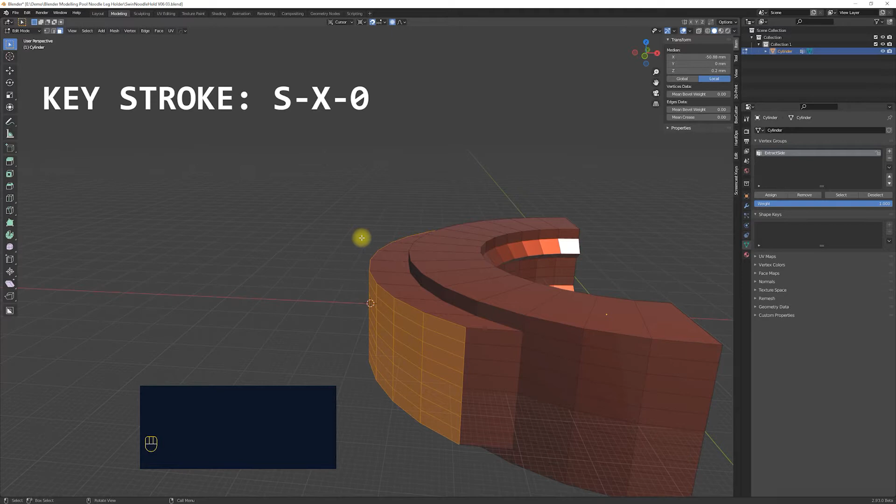In the next step, I create the extensions for the dovetail attachment. I select the set of quads and extrude them in the X direction. To have a straight surface for further modeling, I switch to median pivot point and scale in X direction with a value of 0. This aligns all the quads at the median X position. The related keystrokes are S X 0. Now we can extrude the quads again to create more geometry.

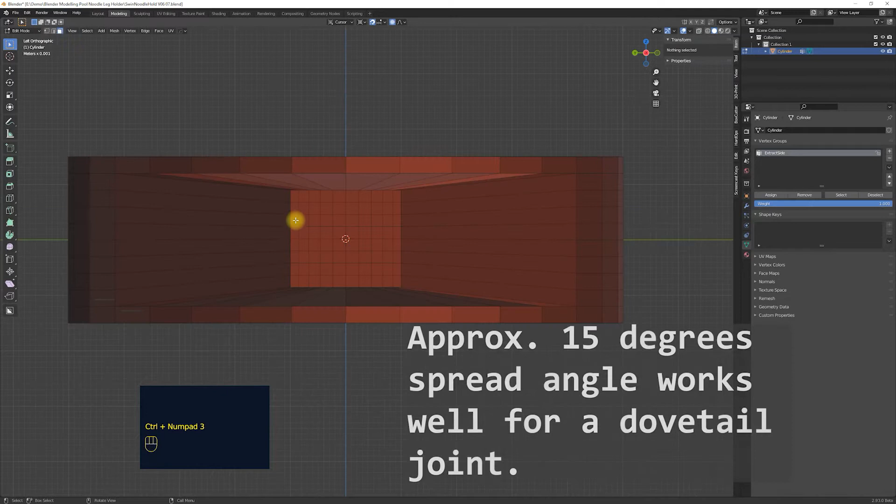Using the orthographic views, you can easily adjust your geometry to the grid view using the absolute grid snap function. To assemble the parts, I decided to use a dovetail joint. Here I'm modeling the first part of it. And I will also use the geometry to create the counterpart of it. To do this, I simply copy the related geometry from the first part and make the new counterpart object out of it.

To give the components a little bit of room, so that it is not too difficult later to push the components into each other, I will later adjust the geometry and leave about 2 to 3 tenths of a millimeter of space. This should be sufficient for a snug fit. But keep in mind, PLA will shrink by another 2 to 3% within a couple of days.

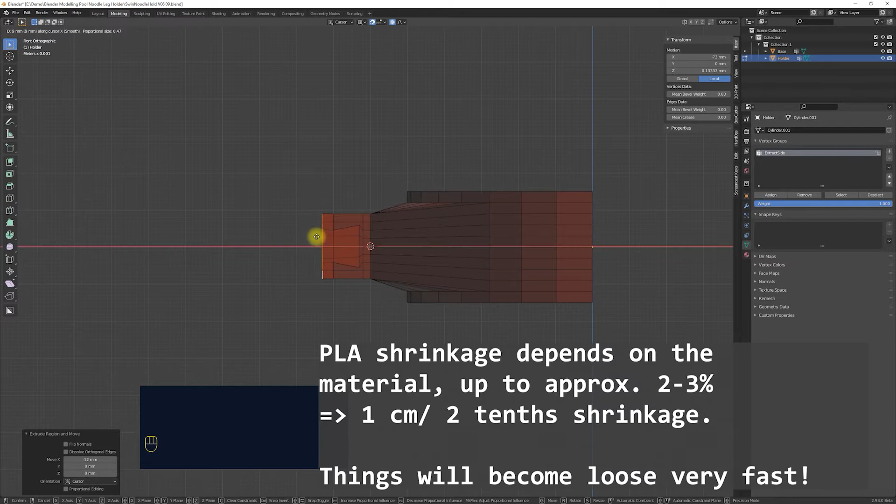For the placement of the legs, I model a nice rounded ergonomic shape. This is where the advantages of proportional modeling in Blender become apparent. I select part of the geometry and scale the attached geometry proportionally. Here we can choose different curve types or select different origin points with the pivot point menu entry to affect the results. With the mouse wheel we can limit the area of effect, and here you should be careful to avoid modifying fitted structures or structures with fixed dimensions.

In order not to use unnecessary material and also to print faster, a shape can always be designed with holes and empty spaces, as long as we don't need this for the structural strength of the workpiece. As soon as parts of the geometry are not needed for the strength of a workpiece, they can be omitted if it fits the overall design requirements.

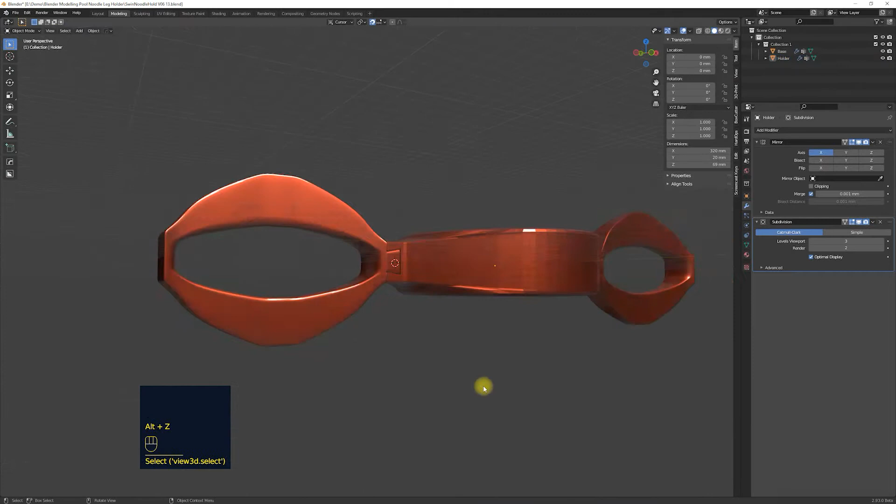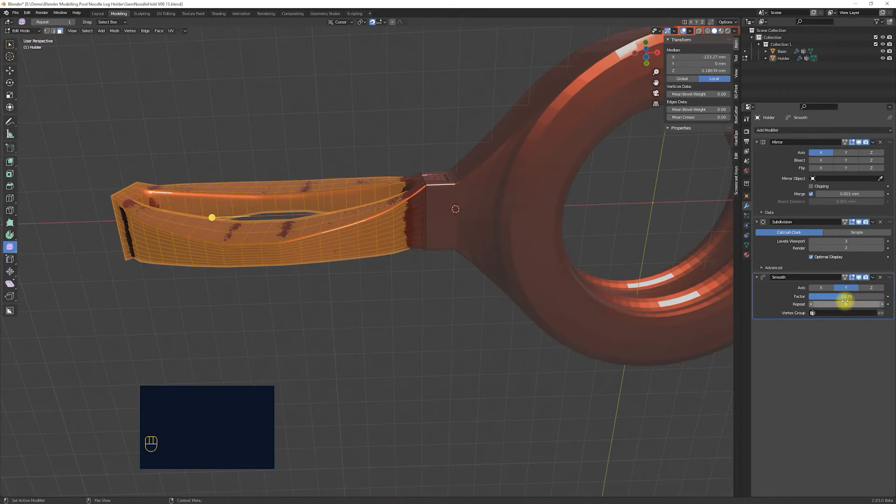To support the subdivision modifier algorithm for smoothing, you should have equal-sized quads. If you have difficult sections in your geometry, you can use the smooth function in the mesh modeling tools to make your quads more equal and to smooth out your geometry.

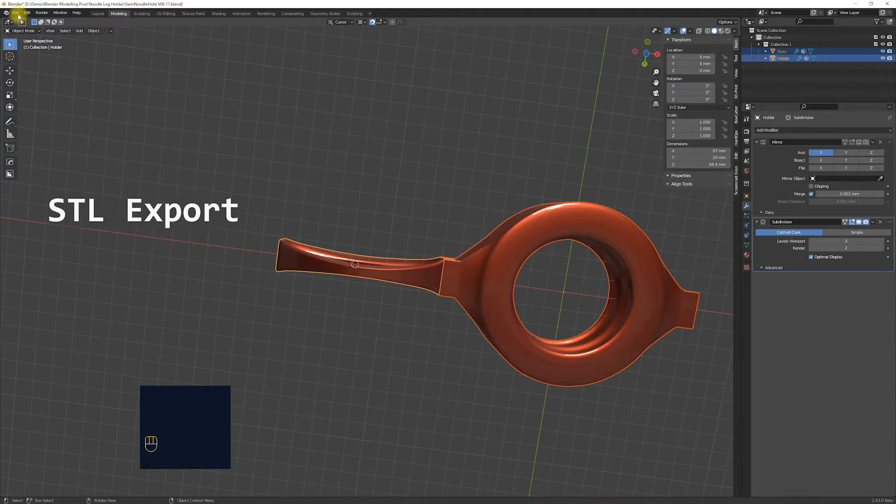Because the subdivision surface modifier works in proportion to the size of the geometry elements, like the size of edges, the size of faces, it is best to make the individual elements more equal and smooth out the mesh as much as possible. To get a nice rounded surface for the ring part, I use the 3D cursor as a pivot point in combination with proportional editing.

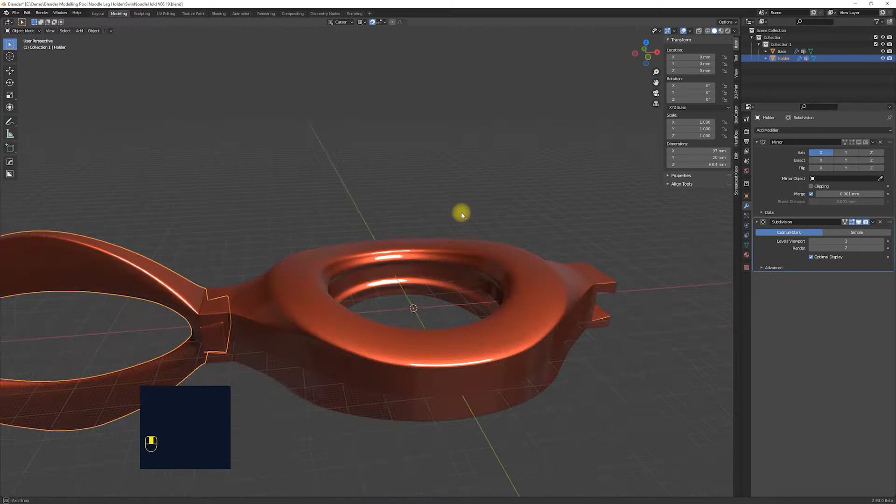Looking at Cura at this time, once I loaded the model, I saw quickly that there were some problems because there were some holes in the model. But this is no problem at all, so I go back to Blender and add additional geometry. Blender supports this very well with several functions like bridge edge loops or grid fill faces.

I can also round off the edges of the dovetail connections a bit and use the bevel function in the mesh modeling toolset. To find all errors, we can also use the functions of the 3D Print toolbox, which is an add-on that comes with Blender. Here I use the 3D printing toolbox to show me the errors in my geometry, and then I can use the mesh modeling tools to correct them.

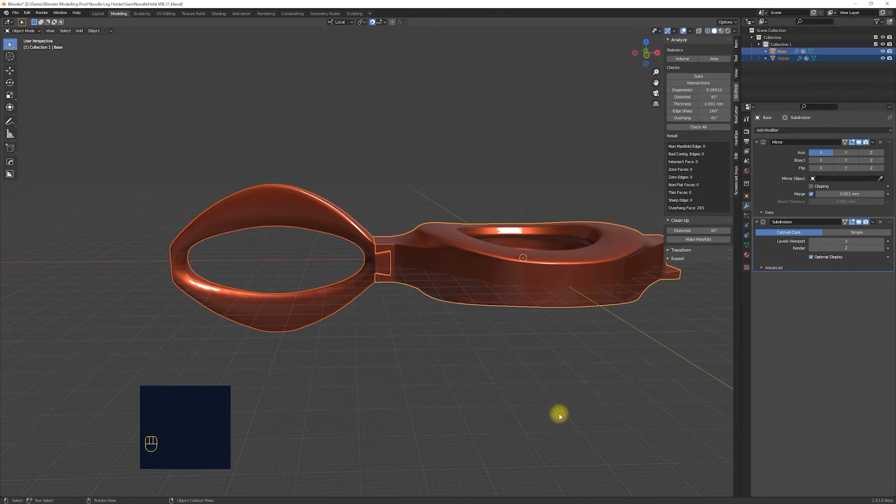I do the slicing in Cura. I show the settings on the right side, and you can just slow down the video speed to see all the individual entries that I changed. For this model I have chosen a layer height of 0.2 mm. The material is PLA plus filament, which is a bit harder and more stress resistant than normal PLA. But it also has to be processed at higher temperatures.

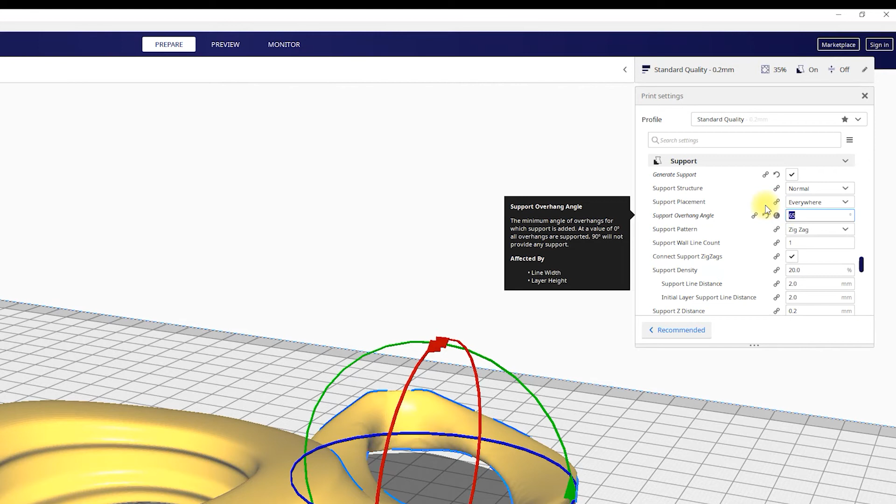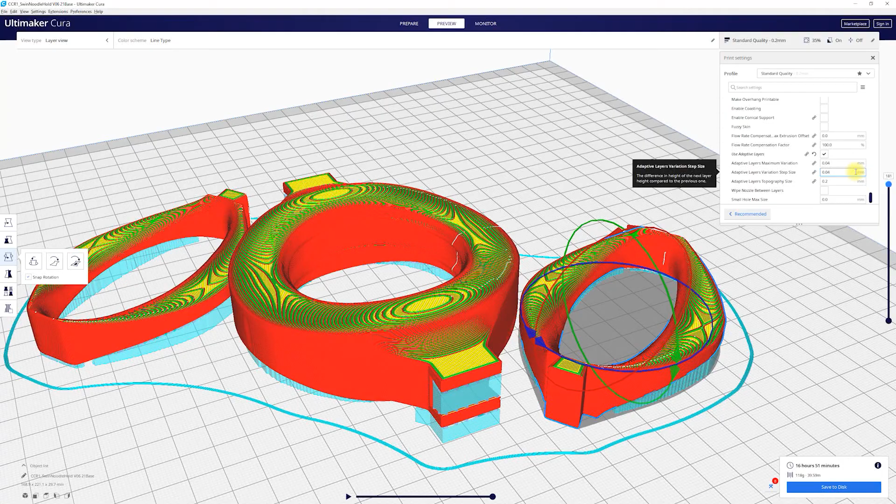I think the component is not exposed to very high mechanical loads, and a filling between 25 and 35% should be sufficient. During the inspection in Cura I noticed that there was a weak point in the connection of the dovetail, and I reinforced the model at this point. The total print time for both parts was roughly 17 hours.

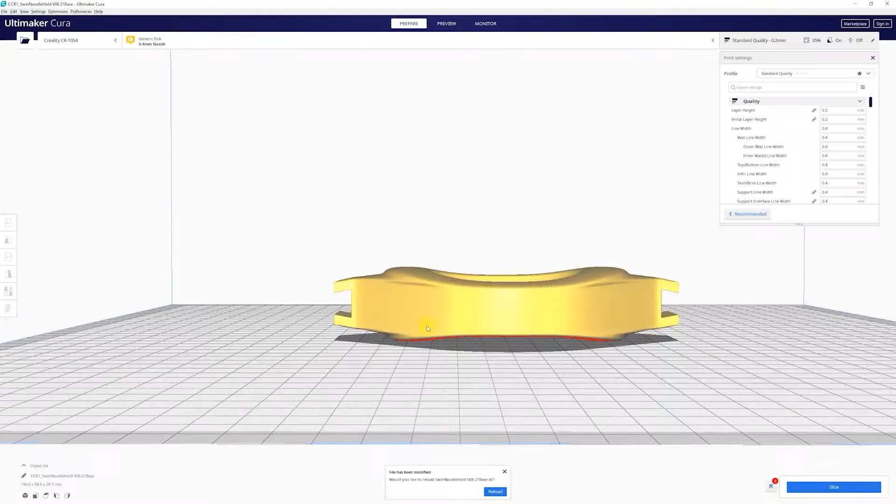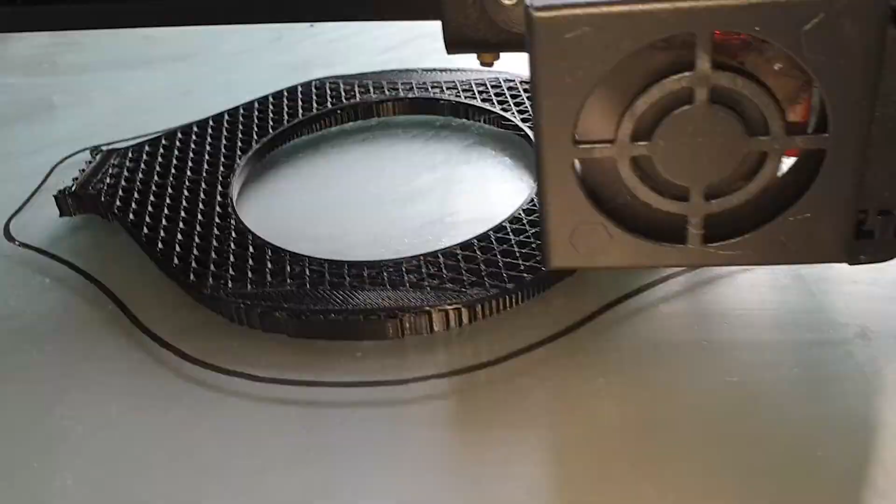Because I could print the parts one by one and assemble them later, I was able to use an optimal layer orientation for each part. This is very important for strength, especially since the parts are twisted by 90 degrees to each other. So I've been able to use large layers on the horizontal plane with maximum layer adhesion between the layers. After printing, I cleaned the print parts from the support structure.

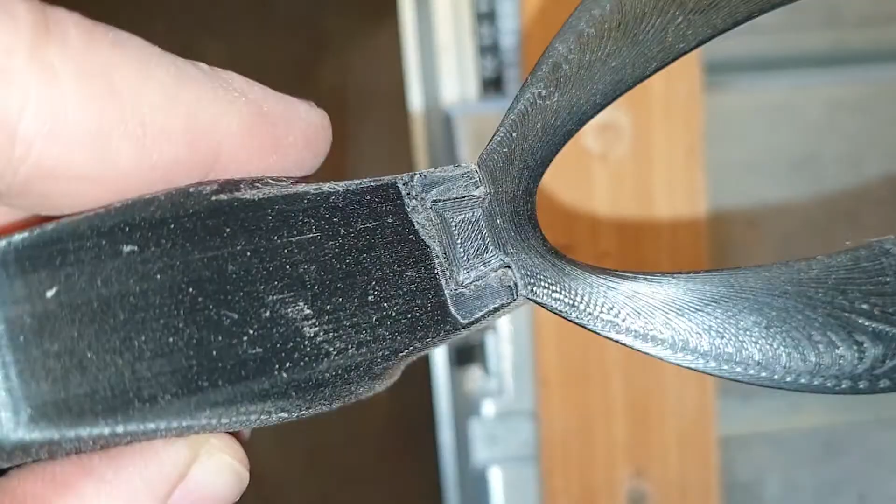Unfortunately, I found out that I was too much in a hurry, and I set the temperature a little bit too high, maybe 5 degrees. So the support structure was difficult to loosen because it had melted onto the model. But it's a prototype, so you have to take small setbacks into account. Nevertheless, the parts could be put together quite well. All in all, I'm satisfied with the result, and the first test looks successful, but see for yourself.

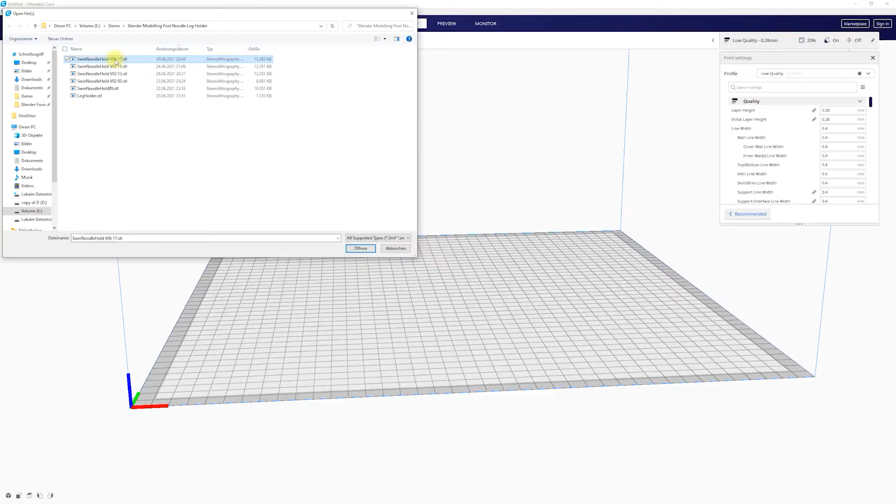I wanted to show with this video some advantages of Blender when it comes to designing 3D objects. With Blender we have the possibility to combine the artistic approach and CAD working techniques. Of course, Blender does not replace any CAD program, but for design studies, especially in the private area, I think it is a very good tool, and I highly recommend that you try it out yourself.